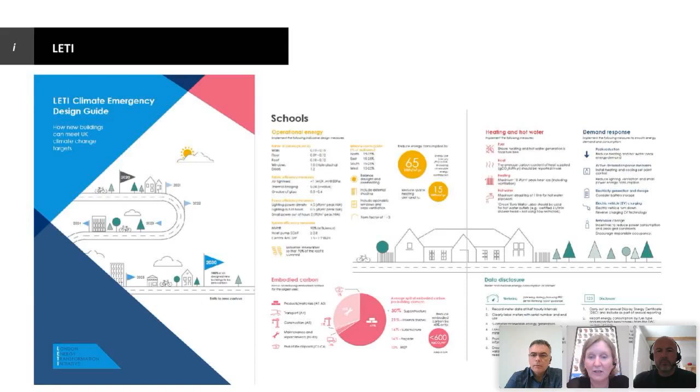Having said that, there's been some fantastic guidance developed over the past couple of years by LETI, and I dare say a number of you will be familiar with their work. And it doesn't stand still. They've just released this week a fantastic piece about aligning embodied carbon targets across a number of different sectors and disciplines, because there's always a challenge when there's a big brief development in construction: how do we make sure we're all working towards the same targets? We all share the same goal, but making sure those are aligned is incredibly important. A lot of the work the LETI team have been doing, which includes a number of my Atkins colleagues, has been a fantastic pointer. We'll come back to that in a few minutes' time.

So in terms of what this means for particular clients, we're working very closely with Cardiff City Council at the moment, and they have a fantastic vision: carbon neutral city by 2030. At a different scale for different challenges, this is something we need to engage with our clients on. It's a fantastic piece of work they put together, but as we got more into the detail with them, it was, okay, so what does that mean in terms of the actual targets that Cardiff are going to present to contractors, to consultants, to say, this is what we mean, this is where we are on the journey at that particular time.

So the piece of work we've recently carried out for them is about saying, okay, we understand your priorities, we understand your vision, but what does that mean in targets, in cold hard facts, and what we're going to be measured against? That transfer is something we're seeing a lot of our clients do at the moment, and it requires broad brush expertise across a number of disciplines to actually make it real for the brief of a new project or something very particular. It's hugely important that we get to that nitty-gritty, because we all need to understand what it means in individual project terms.

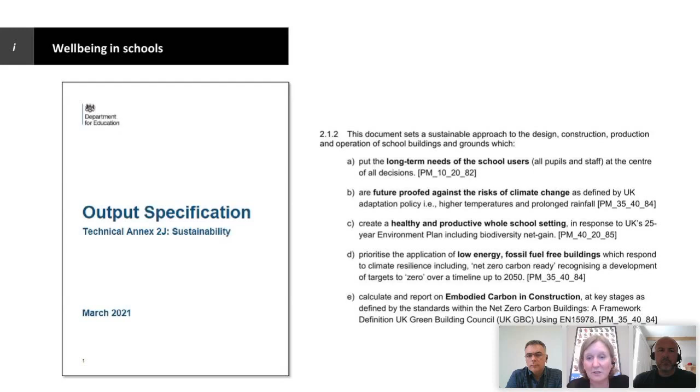But importantly, this reflects what I was saying at the beginning, that the RIBA's guidance is very much that you've got to look at it holistically. So yes, while we're looking at wastewater, while we're looking at carbon, we must be looking at the health and well-being targets. We must be looking at the weather files and the regulated and unregulated energy. So being very mindful that the idea of decarbonising cannot come by itself - it has to be part of this wider approach. So what does that actually mean?

I've come back to the LETI guidelines, because even when they've put some very clear guidance together - this is the LETI design guide essentially, but for schools - it's fantastic the way they've set this out in a really clear way.

But even within that, it's worth noting that there are priorities. There are things which need to be done first, and obviously have a higher weighting than others. So if you look at the ones I've highlighted here, what do we prioritize out of everything on that page? What do we do? The first one is about the U values.

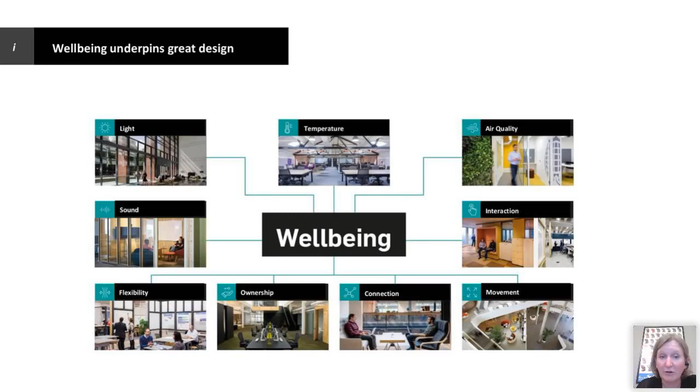So the toolkit we've developed is called Human-Centered Design, and brings those elements together in a series right from the very beginning. The survey, which it starts with, is almost like a pre-occupancy rather than a post-occupancy questionnaire. How do you work? What do you do? How do we actually make sure we provide what you need?

Whilst this started in university settings, we found it phenomenally useful to talk to our clients in a slightly different way through this toolkit. We've been prioritizing its use in schools lately, and that's been great to enable the young people - secondary schools is where we've been focusing recently - to make sure we hear their voices as to what they want, what makes them comfortable, and how we can arrange spaces to benefit them and also the staff who are going to be using those spaces.

An example here - although this is an HE example - the Institute of Health and Wellbeing. We used this right at the very beginning. This is a new build as part of the new Western campus for the university, and the idea of coming together as a set of different personas. These were filtered from the different responses we got, and allowed us to test back as we were going through the standard briefing, in terms of space requirements and site analysis, but to enable us to put the well-being in and test at each juncture to make sure we were understanding what they needed, and testing our design responses accordingly.

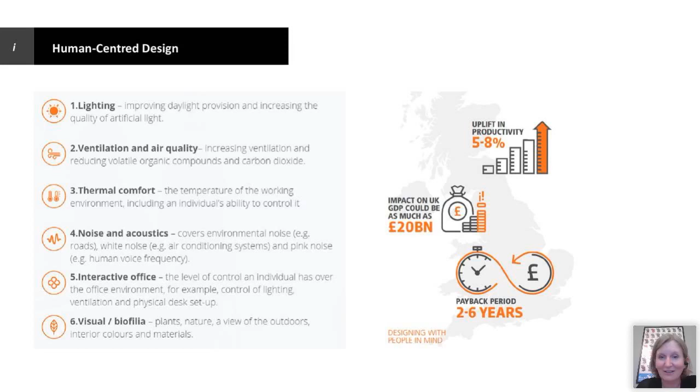So if we're to step back, what does that mean in terms of existing buildings? Primarily I've been focusing on new build in the first part of the presentation, but if we're committed as the UK to carbon zero by 2050, the new challenge of 78% by 2035 is a real challenge, since 80% of the 2050 stock has already been built. That's the retrofit first concept from the Architects Journal, and it's at the forefront of our mind as we make choices about how we develop and help clients decide whether to build new or analyze their existing stock seriously.

So I'm going to hand over to John now, and he's going to go through the detail of the refurb elements.

Right, well thank you Helen. I think Helen's been talking with a primary focus on schools, and although my background and responsibility at Atkins is around higher and further education, I think a lot of what we'll talk about in this half of the presentation is actually relevant to all building types and across the public sector.

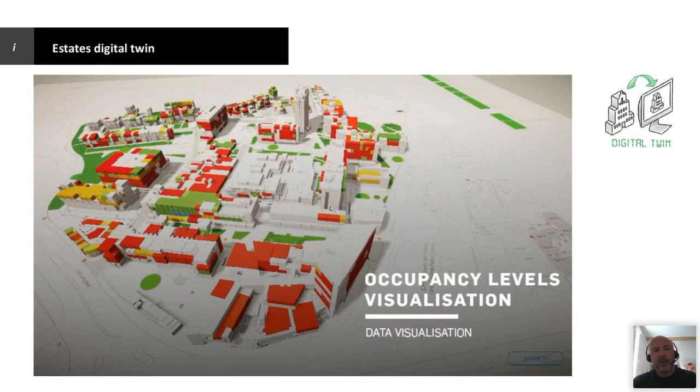This is a data visualization tool for the University of Plymouth, which in this instance was looking at visualizing the utilization of space. We're working with the University of Plymouth now on how we can use the same tool to look at energy use and building conditions, to visualize that situation across the estate. Visualizing your estate and buildings makes it much simpler and easier to engage and move a strategy forward to improving matters.

What's great about this tool is that it just takes existing data. In this case, with the University of Plymouth, it took just their existing space plans and existing Excel data—the data they'd have to issue to HESA to identify their use of space. There are a number of factors, and it brings both of those through various pieces of in-house software to actually visualize that. So although this looks like a 3D model, it wasn't built from surveys—it was generated by taking 2D data, CAD drawings and data, and combining them through a piece of software to instantly visualize this.

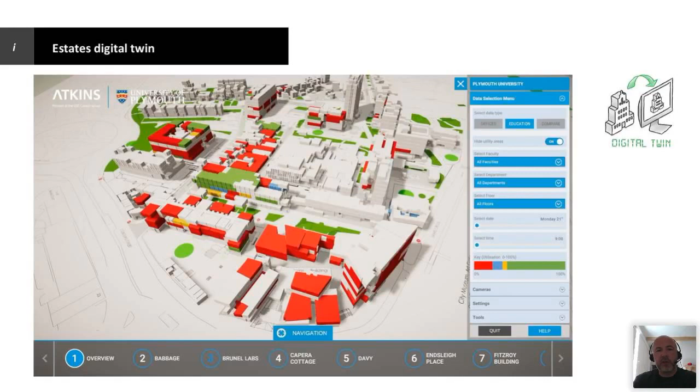Through a software we have called Icon, you can actually visualize that, and we're working with them. You can imagine this with EPC ratings, with carbon emissions, with condition surveys—very quickly pulling this information together and visualizing it. That's a powerful tool when making decisions.

Feeding into that, as well as those manual processes of collecting data in that Excel document, is work to incorporate sensors.

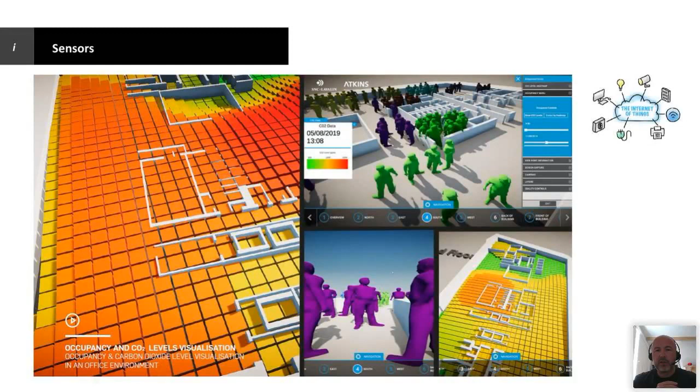This was the work we've been doing with a statutory company, where our colleagues in creative design actually built, using simple Raspberry Pi sensors installed across the building, so that we were able to gain a huge amount of data around CO2 levels and occupancy. We could map that and model that, and actually see the movement of people, the interaction with the external envelope, and almost in real time take that data, play it back, and understand and inform decision making about where we had to look at making changes within the building.

Taking that to another level, Helen mentioned before about the Institute of Health and Wellbeing at University of Glasgow. This is a building currently on site, and it incorporates a data mesh within the floor plates. So that's taking what in the past would just be your light sensors for occupancy, switching lights on and off, but giving that much more granularity and intelligence. Not only is that controlling the lighting on a much more granular level, but it's also feeding back to provide information about the occupancy of spaces, when those spaces are occupied, and what the density of occupation is.

Moving forward through this huge change we've had in the use of space, having something like this is going to be hugely powerful, because one can see across a floor plate and across different floors and areas of the building very quickly to understand how people are using that building, and how you can manage it, maybe lock down parts of buildings to reduce the energy within them, and manage both the use and the systems in a much more efficient way.

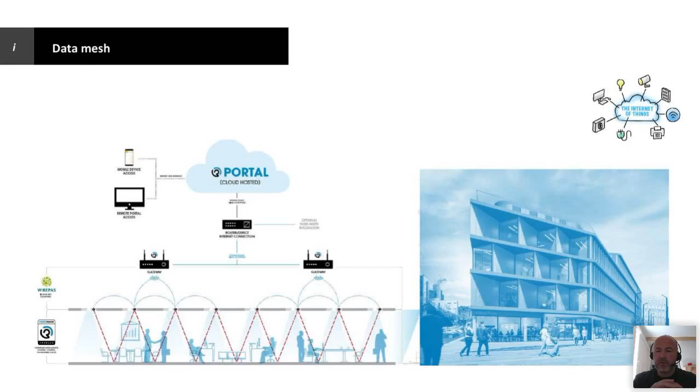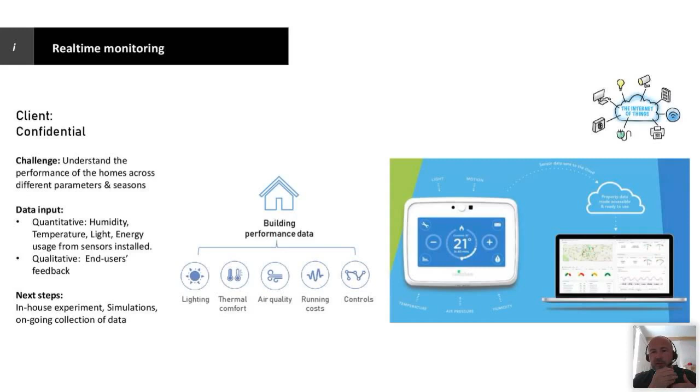This is actually an example which is happening in real time. We're able to monitor this, and that's informing the decision making about the management and the future development of the designs of housing. You can imagine this equally applicable within a school environment or across a public sector estate.

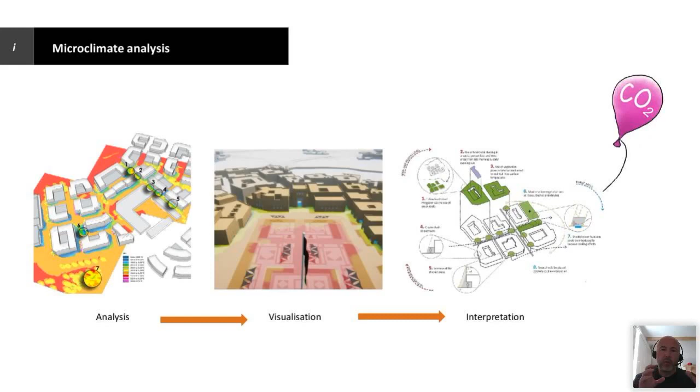Finally, Helen talked about different scales, and we've been zooming in and out here. This is zooming out to the macro scale of a campus or an urban centre. Now, this is work we've been doing over recent years in the Middle East. But we're starting to do this work here too - we've got a commission, for example, with the Barbican at the moment, looking at microclimate analysis and how that can fundamentally inform decision making about not only the design of buildings, but the space around buildings and the interaction between the two.

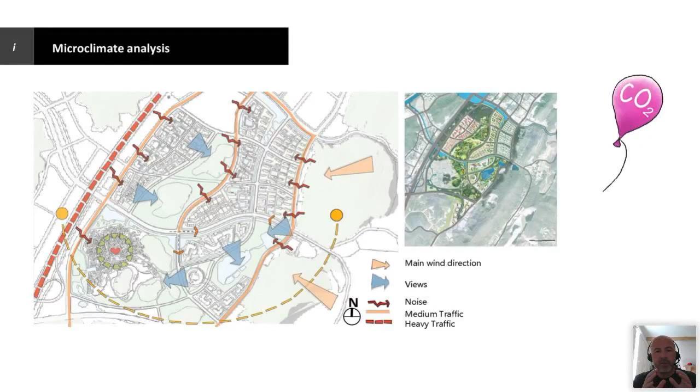That's first about understanding the context of any kind of space, whether this is part of a city or part of a campus, and understanding the key drivers in terms of the prevailing wind and the standard contextual environmental analysis. But what we're able to do through software is dive into this at a much greater level, to look at wind speed, the orientation of buildings, the actual materiality of buildings, and fundamentally materiality and the context of the environment they're in, to actually make certain assessments.

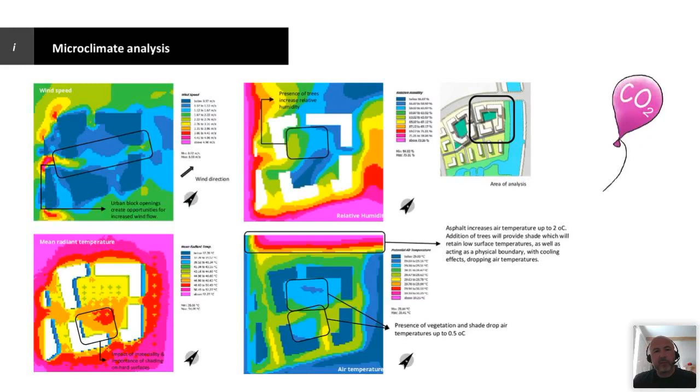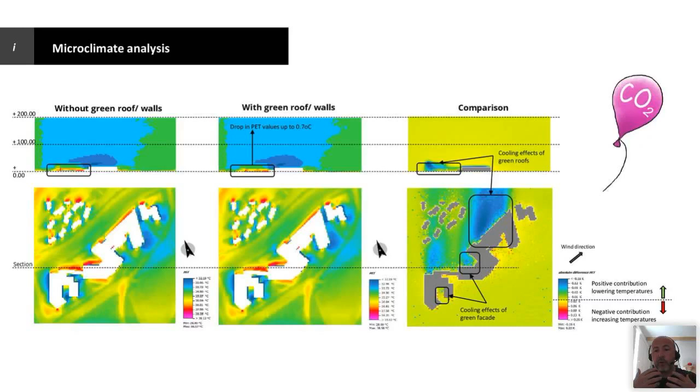That analysis was only one part of a whole series of studies that can be done. You can bring all of those studies together to inform the positioning of buildings on a site, their orientation, the gaps between buildings, the height of buildings relative to one another in terms of airflow and daylighting, the planting around buildings in terms of the positive impact they have, and the use of different finishes. This is a piece of work you can imagine is critical in the Middle East, but we're seeing it can equally have a fundamental effect in the UK. We're just starting a series of projects around that.

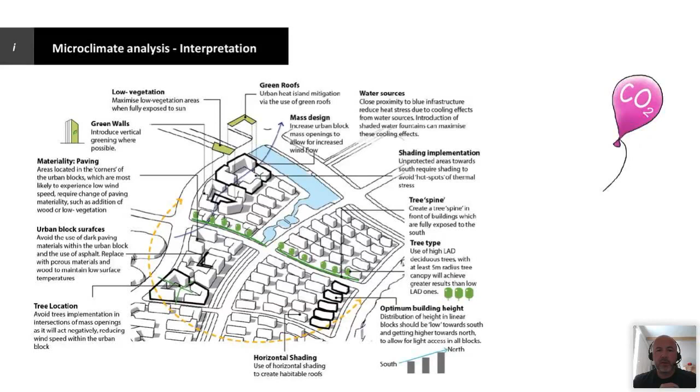Hopefully it's been a broad range of topics, from the very detailed specification to the more general ideas in the middle of the presentation, to some thoughts about how we can use technology and digital tools to inform our decision making and our journey to net zero, and the decarbonisation of education. So I think that's it from Helen and I, over to you if we've got any questions.